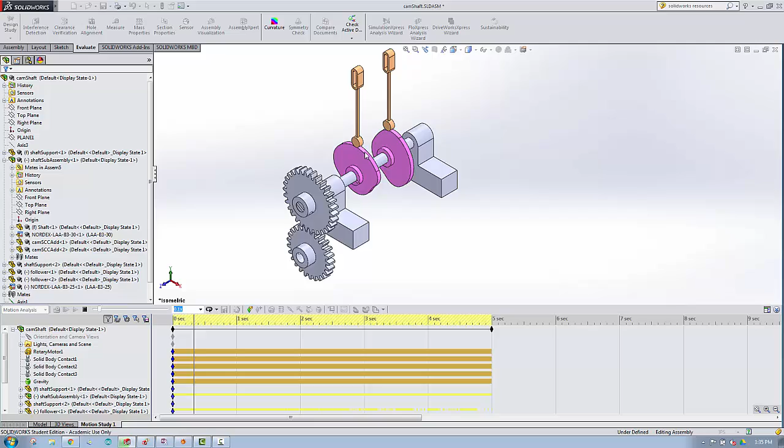You can see that it's in the Y direction pointing down, and since we're in the inch/pound/second format, I'm using the standard gravitational constant for sea level in inches per second squared. All right, so let me go ahead and play the video again. So you actually saw the jump there when the cam went back to its initial position. I can look at it so you can get a better feel for the motion.

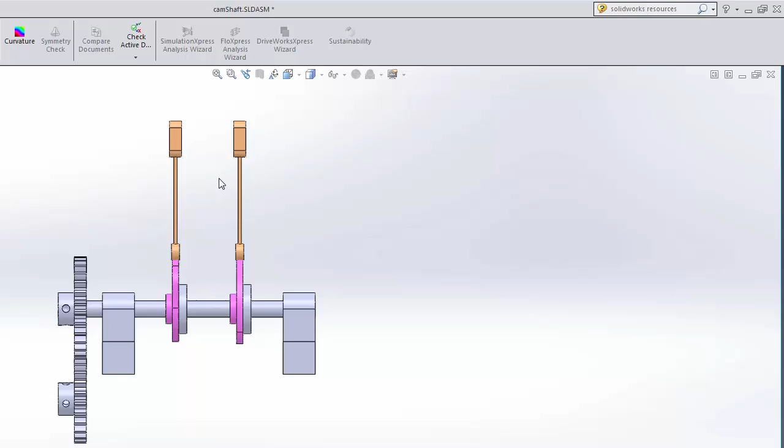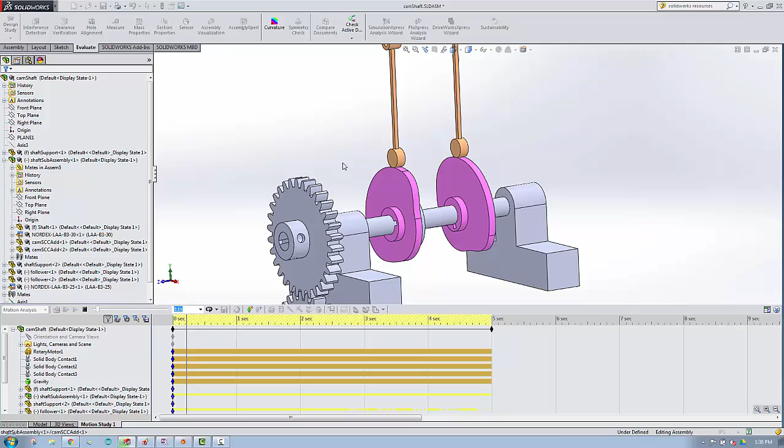Now, as I said, one of the motions, the rise motion, is modified trapezoidal, and the fall motion is constant acceleration. And they are both at different duration levels with regards to angular rotation. The cams themselves are 90 degrees out of phase. I don't know if you can see that here as they come around. Here's the one key and there's the second key, so they are 90 degrees out of phase. Let me just go ahead and pause this one more time.

Now I did the settings, the motion study properties. Typically, when you have gears, to get even just a good animation, even though this is a motion study, you want to make sure that the frames per second is not anywhere close to a multiple of the gear teeth. Otherwise you'll get either stop action motion, or sometimes the gears will appear like they're running backwards.

I've also set the 3D contact resolution to precise contact. I've also pushed the accuracy up. It probably could be pushed up a little bit larger. And I've set the cycle time, so the cycle settings is 360 degrees, but in this particular case I've set the cycle time to 5 seconds. That's producing one complete revolution of the entire system.

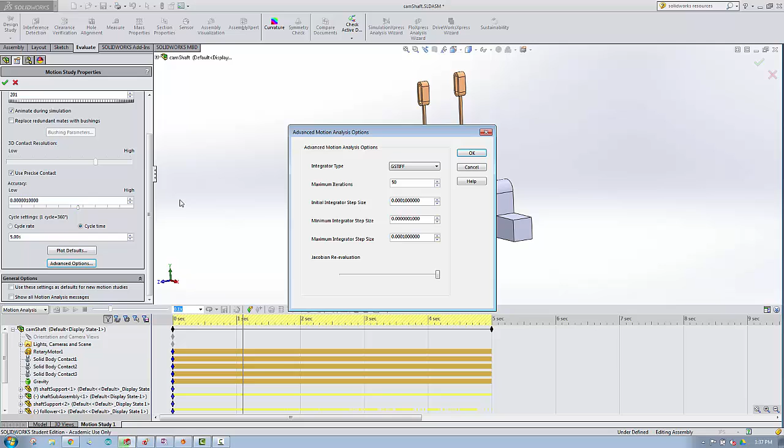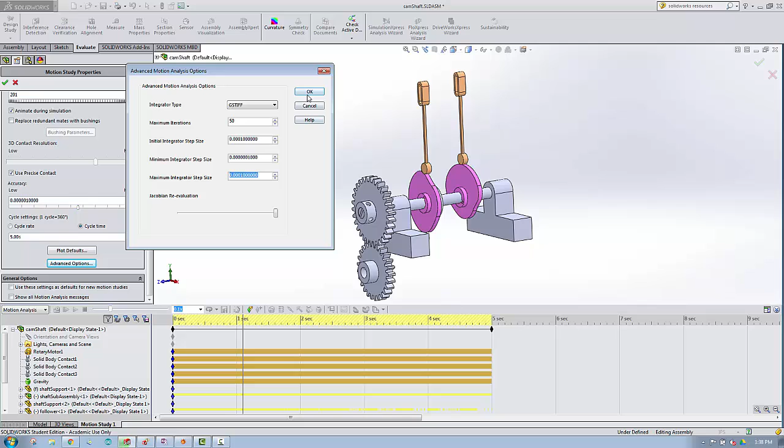And the last thing that I've modified is under the advanced options, I've maintained the integrator type, but I've pushed up the maximum iterations to 50. I've also decreased the maximum integrator step size. This is normally, I think, 0.01, so I've moved it down 2 orders of magnitude. It took a significant amount of time to run through the 5-second analysis, but I've gotten decent results, not great results in regards to the kinematics.

Let me go down here and show you the results. Let me show each of them individually and the acceleration. Notice I'm only taking a full cycle here. I'm going from 0.75 seconds to 1.8 seconds, which is approximately one full cycle. So you can see my rise and my fall. Notice that there's 2 different durations. The fall is considerably longer.

Here is the characteristic of a modified trapezoidal. And you can see that it's decent down here on the deceleration side of it, but there's this one point that has jerked up pretty high here. If I take a look at my model, I'm probably expecting it to be positive 44 inches per second squared.

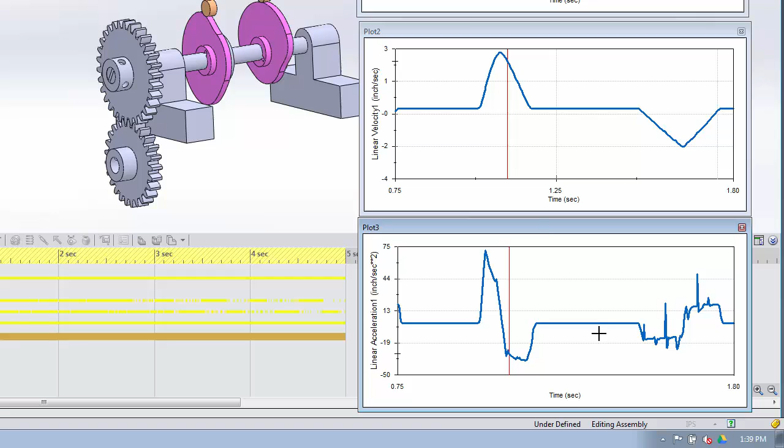I'm getting fairly decent results in terms of the constant acceleration fall. This is what I would expect for my velocity. For the acceleration, I'm getting the flat curves, but I am still getting some noise over here. So what I would do now is start from my linear displacement, right click and export to CSV, and then do my numerical derivatives outside of SolidWorks, because SolidWorks doesn't use a very sophisticated methodology for producing these final curves.

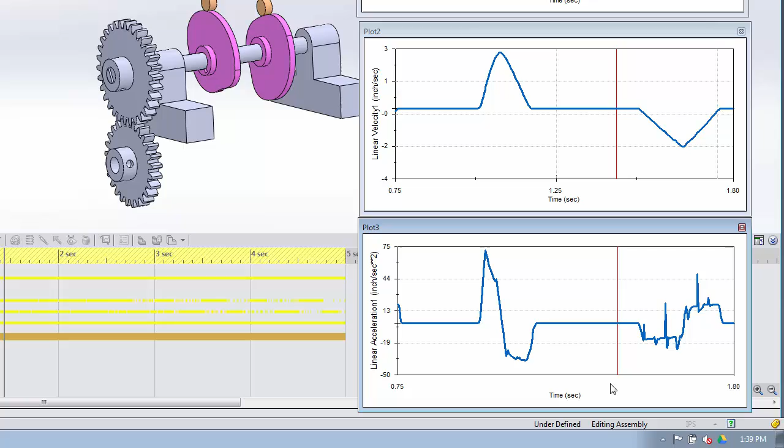Note that if I hadn't set up the modifications here on my motion study properties, I would have gotten fairly ugly acceleration plots. So you do need to push up the analysis. So while I have those up, I've got to close this down. Let me back the time up just a little bit, and then I'll let it play for these few seconds.

Actually 1 second. So I am moving at a fairly slow rate. So if I hit play now, oh, it went from play from start. Anyway, at about 0.75 seconds, which is right about now, you'll see the traces start. And we're getting a full cycle. I believe it's this one. Yeah, this follower cam is what you're looking at.

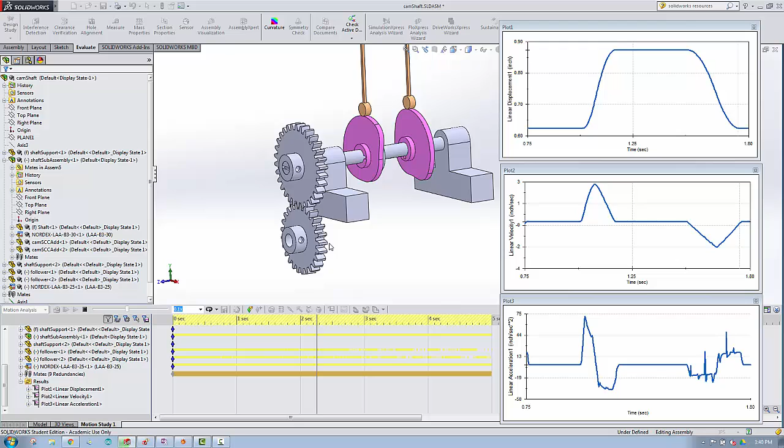All right, so that's going to conclude this video, just to give you a full look at what you can do with SolidWorks and motion analysis.